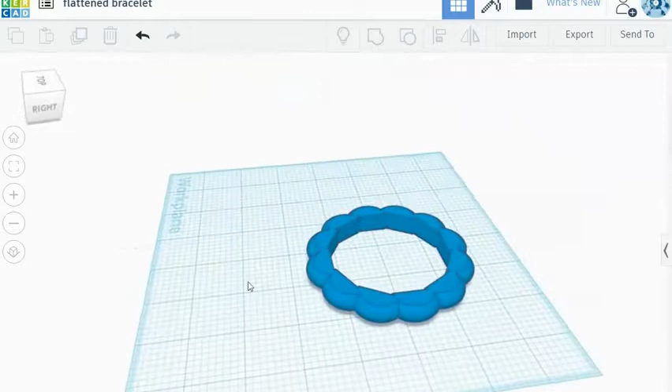Okay, so here I am in Tinkercad looking at activity 10. You've learned how to use the smart duplicate tool. Perhaps you've made a flower or some other thing like that. And I actually was able to make this pretty cool bracelet here, kind of like a bangle bracelet, by using that tool. And it's a little tricky, but I think you can handle it now that you've been working in Tinkercad for so long. So I'm going to make one from scratch.

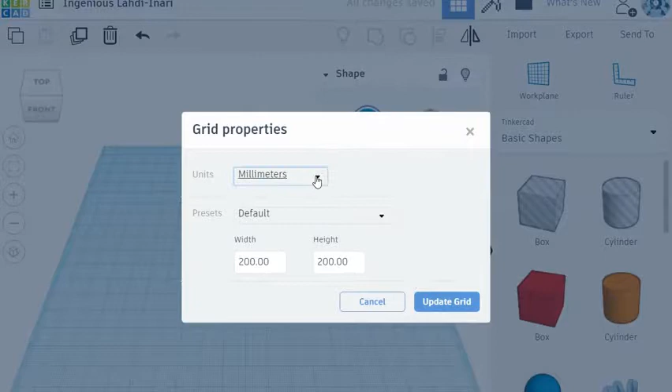I'll just go here and new design. And the trick is not so much making it as making something that will print well. So the first thing we're going to start with is a sphere. Okay. And I'm going to hide this here, and I always like to be in inches instead of millimeters, but if you like thinking in millimeters, you can. I'm going to move up on it a little bit.

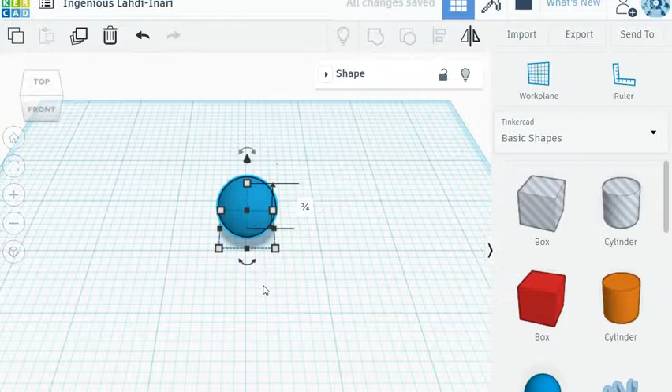I'm going to make all of these 0.75. Okay, so you click on the little box, 0.75, the height box, 0.75. I can get rid of the shape tool here if I want to. So now that is a 3/4 inch round sphere, which is great. Excuse me, what I want to do is cut it in half.

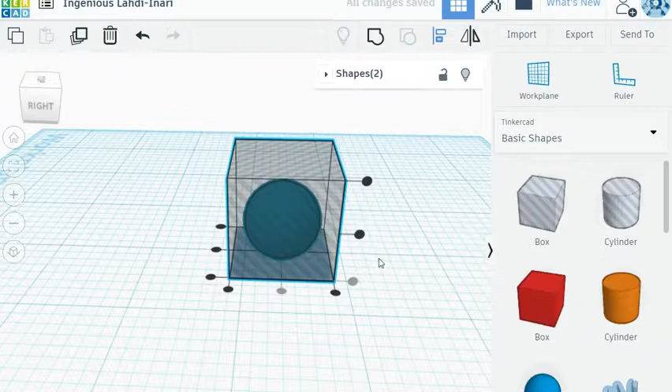So I can either take a box and then turn it into a hole, or I can just take this box hole thing here. I'm just going to kind of put this over my circle, and it might not be quite perfect, but if I highlight both of these things and click on my align tool, there, it's perfectly aligned. Shazam. All right.

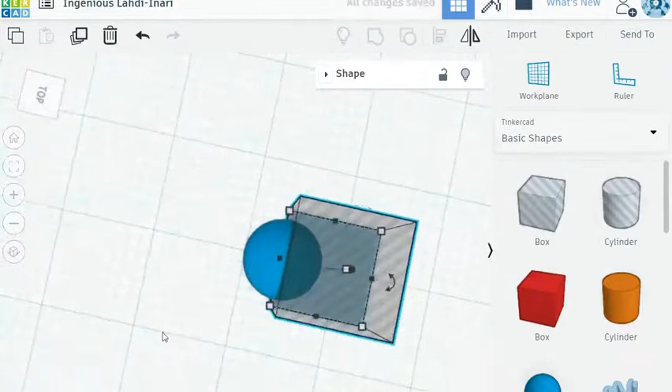Now what I want to do is slide it over until I have half of my, oh, that's kind of weird. Wow, I moved that away. What I want to do is cut my sphere in two. And that looks pretty darn close, right? Again, I'm using my rotate tool quite a bit here. And if I group these two shapes together, it is now a hemisphere or half of a sphere. All right, which is great, except I want the bottom and top flat.

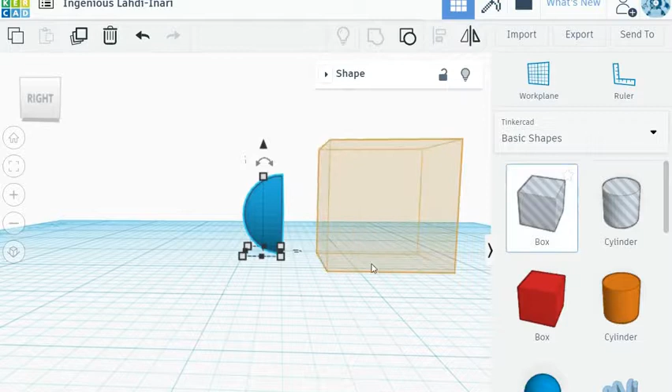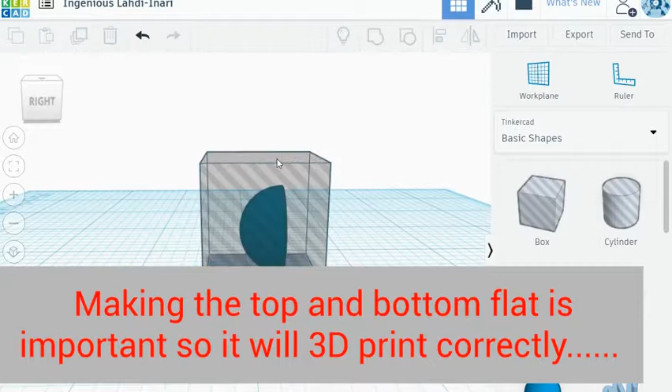So I'm going to do a very similar move with bringing in this box. Might even align it again, just for giggles. Make sure it's nice and even. There it is. It's right in the middle of it. Okay, and then I'm going to use my, come on now. It takes a second to get out of there. I'm going to pull this guy up,

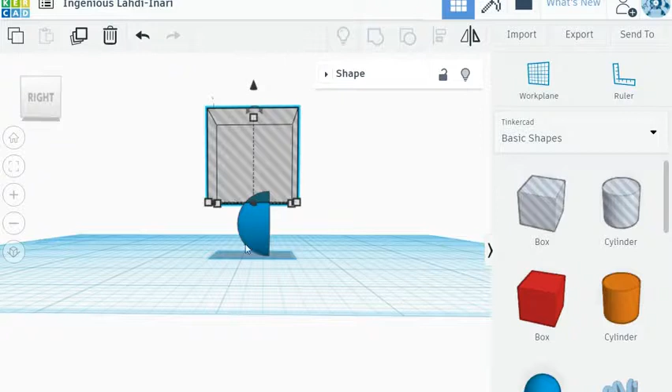and I keep on changing my rotate, and it looks like, yeah, if I do that, it tells me that I'm 5/8 of an inch, which 6/8 would be 3/4 of an inch. That tells me I'm lopping 1/8 of an inch off of the top of this guy here, making a flat here. So I highlight all of this, I group them together, and look at that. Nice flat surface on the top of my sphere. I want one on the bottom too. So what I'm going to have to do is rotate this guy 180.

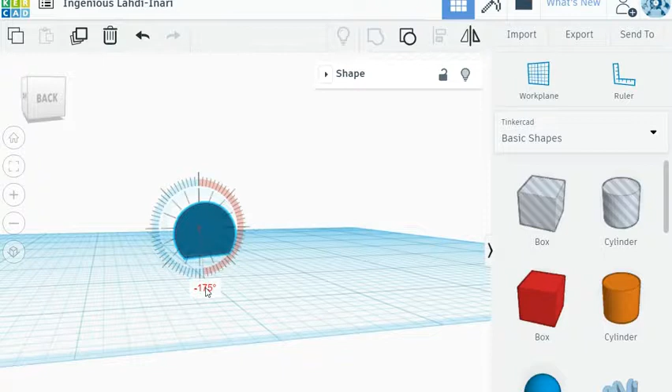And I know I'm moving really fast here, but I know you can handle it because you've been doing this for so long. You should be ninja at your Tinkercad skills. This isn't like activity 1 or something. There, beautiful. Look at that. And it's on my work plane.

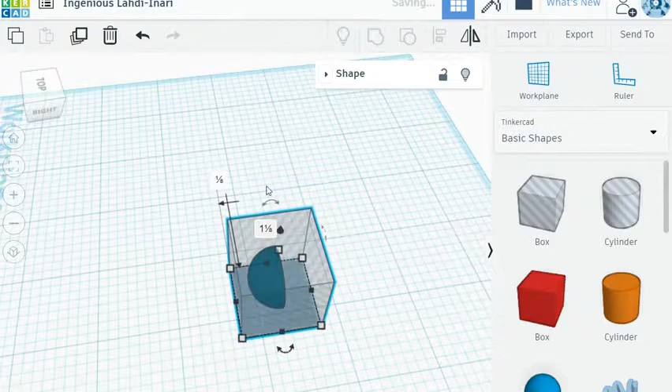There's my flat surface. And I'm going to do very much the same thing again by grabbing this box, bringing it somewhat close, sticking it over it, highlighting them both, clicking on my align tool, centering it. I don't even know if this is necessary, but it makes me feel better.

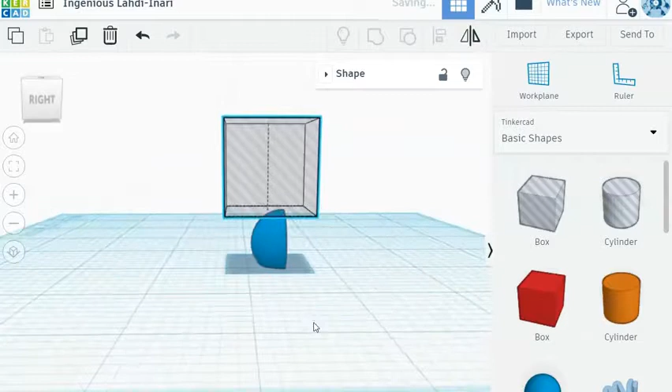Click until that goes away. And now I'm going to start lifting this up, and it should do the same thing as it did before. 1/2, 5/8. So now I've got 5/8. No, 5/8 puts me on the tip of that. I guess I have to come down another 1/8. It kind of snaps down. It's kind of like it goes from place to place. It clicks to that 1/8 of an inch increment there.

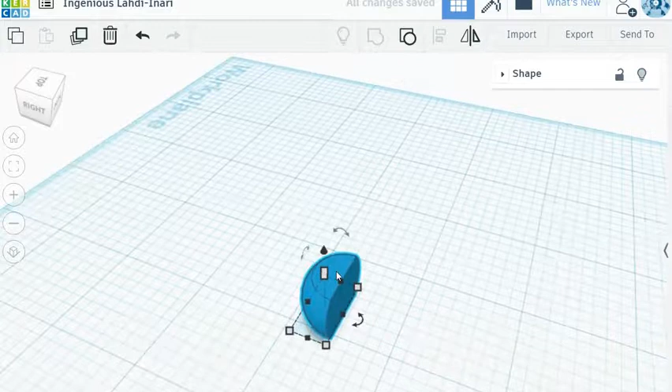So I highlight both of these things, group them together, and now I've got this hemisphere with a flat top and a flat bottom. So now what I want to do is the smart duplicate tool, and so I just kind of click on this guy, Control D, which has duplicated it, and I can always get rid of this and zoom in a little more so it's easier for me to see. And it should, yes, have made me a perfect copy of that, right?

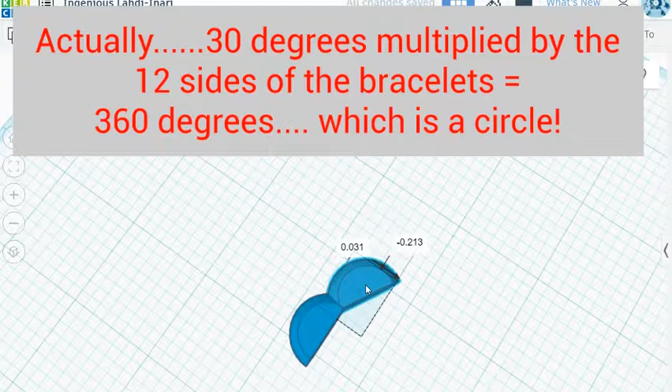Then what I want to do, and this is where it gets a little tricky, and you've had to do this in your last activity, I'm going to turn this 30 degrees, just because I say so. And I'm going to move it down until it's kind of joined here. If we zoom in, you can kind of see from the bottom how that fits together there. All right, and that was 30 degrees.

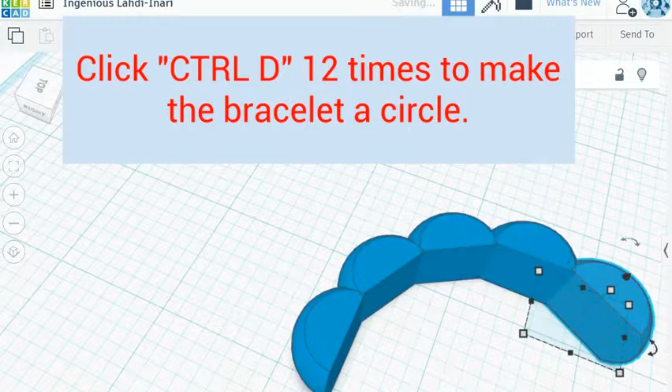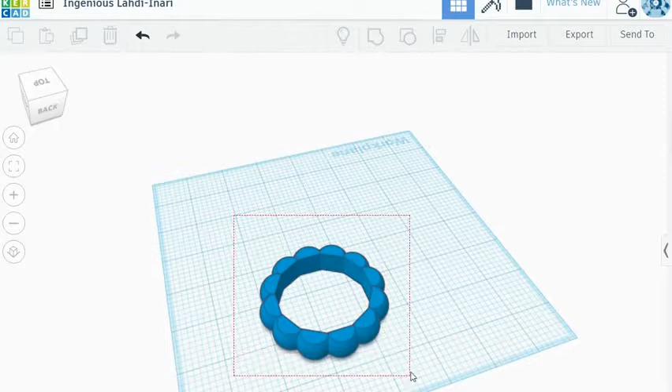So now if I go Control D again and Control D again and so on, here I'll zoom out a little bit. Control D and D and D, and look at that. Booyah, I have myself a bracelet. Pretty cool. All right, I don't know why it's kind of over on this edge of my work plane. What I need to do is turn these all into one object by grouping them. And when I do, it tells me it's 2.741 inches. That's sort of a random thing.

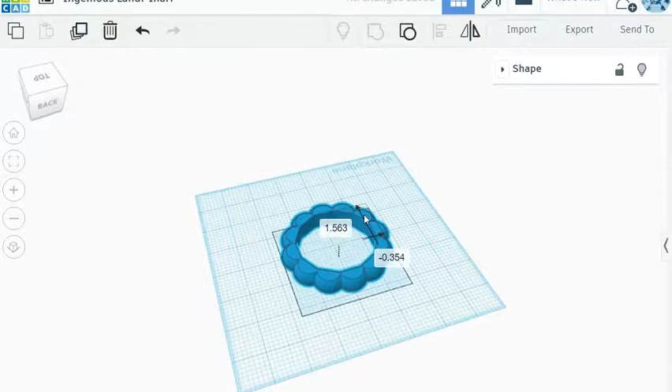What I want is for the hole inside this bracelet to be big enough for somebody to put their wrist through it, since it's a bangle bracelet. So I'm going to make the outer diameter 3.5 over here and 3.5 over here. And I can move this guy a little more into the center, and it should be about a ½ inch tall. 0.505. I can make that 0.5. Didn't change it much. And these dimensions are 3.5 by 3.5.

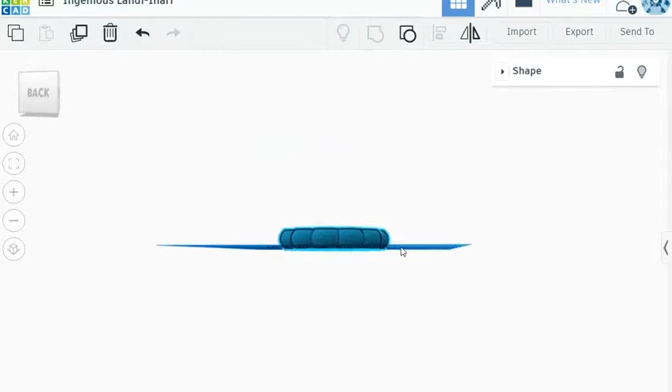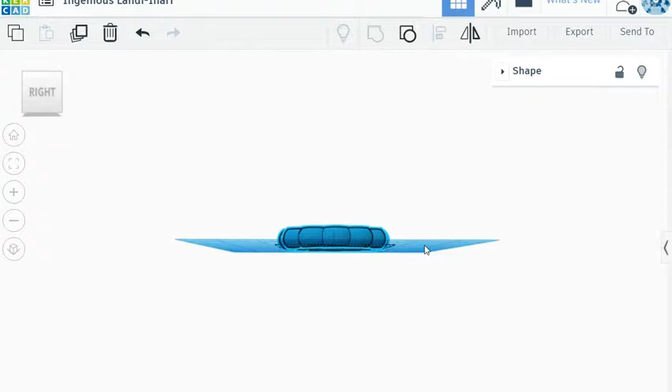And that should be a pretty easy print for the printer, because it's got this nice flat bottom and flat top there. And then it's got those rounded edges, and it shouldn't even take too long to print. I've tried doing this without chopping off the bottom and the top of the sphere, and it just didn't print very good. There were a couple of sharp edges and things that didn't come out very nice, and I think this will actually speed up the printing process.

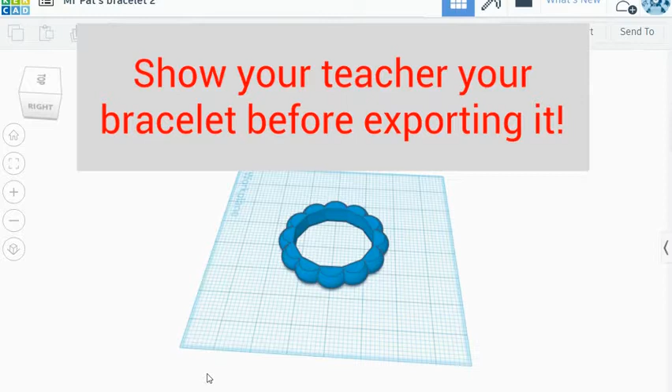So, of course, you want to name it with your name, Mr. Pat's Bracelet, whatever. Bracelet 2, I'm going to call it. All right, and then you know to export it as an STL, send it to your teacher. Show it to your teacher first. Remember, you have a limited amount of prints you can do here, but it's kind of a neat little way to make a piece of pretty solid, pretty strong plastic jewelry that you could wear or give away as a gift. So check it out, give it a try, and if you get stuck, see your teacher.

We might not help you much, but at least we'll enjoy your difficulties.

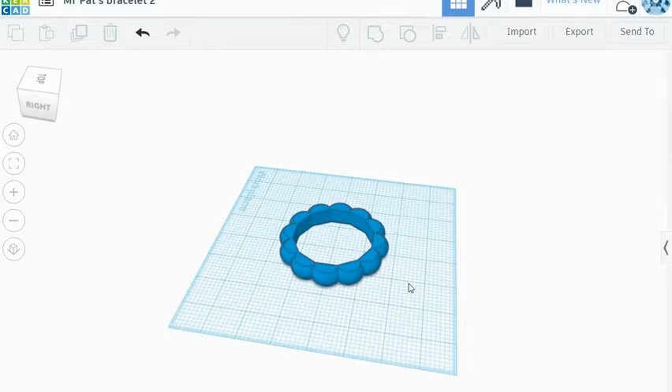And like I say, that's how you smart duplicate a bracelet. Enjoy.